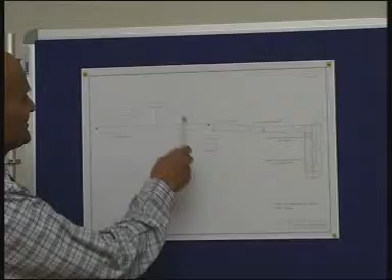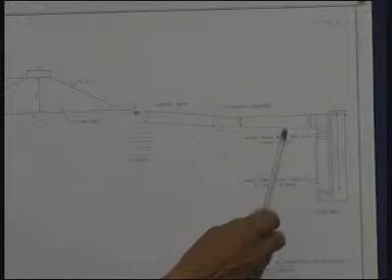Now we will go through one sketch to illustrate how this can be done. This is the minor irrigation tank in cross section, and this is the FTL, full tank level of water stored in the tank. Supposing this is the ground level, and in the ayacut, that is the command area of the tank, we have a dug well. These are all figuratively represented.

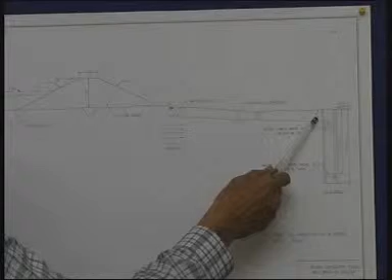When there is no water in the tank, the groundwater in the well would be at a lower level. When the tank gets water, even 1/4 full or half full, there would be recharge to the water table due to percolation and seepage, and the water table level will increase from low to a very high level, at a shallow depth of 2 meters below ground level. In some wells we see the water table coming right up to ground level, and in some cases water overflowing the wells in the command area.

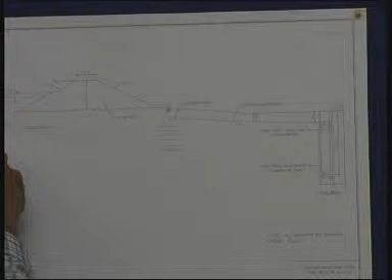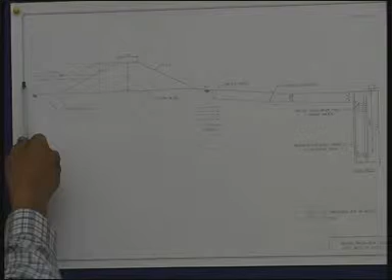This is possible because there is storage here, there is deep percolation and seepage water recharging the water table, causing it to come up. Therefore, the whole phenomenon occurs on account of impounding the storage and spreading the stored water in the submersion area, and that results in recharging the water table.

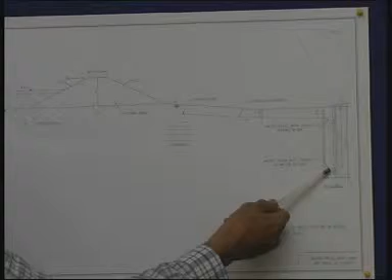If supposing a similar condition can be brought in the catchment area in the upland areas, we will be able to achieve the same result of increasing the water table level from a lower level to a higher level. This is what has already happened wherever such mini percolation tanks were constructed.

We will now go through the aspect of desilting the tank bed of minor irrigation tanks. There is a common feeling that when watershed development works are executed in the catchment area of the tank, there would be reduction in inflow into the tank, and to that extent the tank command suffers for want of water. Now let us see how far this would be valid, and if it is valid, to what extent.

For the purpose of understanding the whole problem, we can divide the various tanks into broadly three categories. The first category is where there is adequate yield in the catchment, yield more than what the tank needs.

That means there is surplus yield in the catchment area of the tank. In such a case, even if watershed development works such as mini percolation tanks and various other structures are constructed, there won't be any adverse impact on the flows into the tank, because there is surplus yield. So with regard to such tanks, there is no problem with the yield getting reduced.

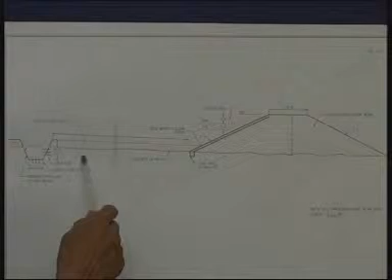So in such cases, the manner in which deep percolation has got to be increased, let us study how economically it can be done. This is the ground level and original ground level, and this is the full tank level, and the revetment is like this, and this is the downstream side of the tank. The water storage is on this side.

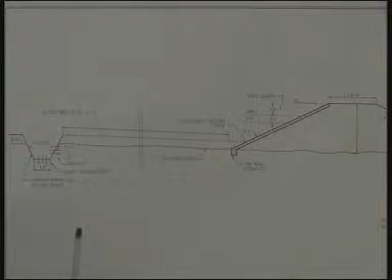And it got silted up to this level, let us say. One way of increasing the recharge in this percolation tank is to remove the silt which is close to the tank bund section, because this silt will be mostly clay. That could be removed, but that's an expensive item of work to remove the entire silt content.

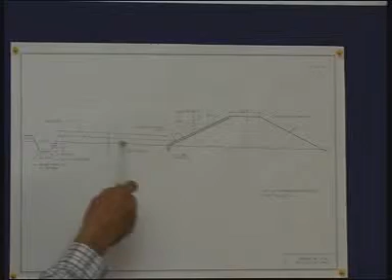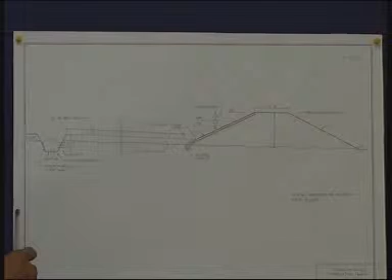Instead of that, we can achieve the same deep percolation and seepage by means of a trench excavated like this. The details of this trench are given in the guidelines approved and given by the Chief Engineer Minor Irrigation of Andhra Pradesh in 1986, and the diagram and details are there in that.

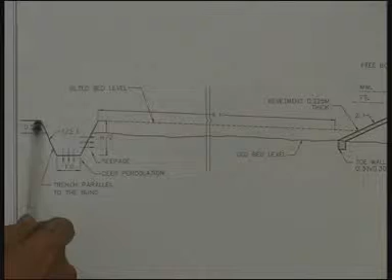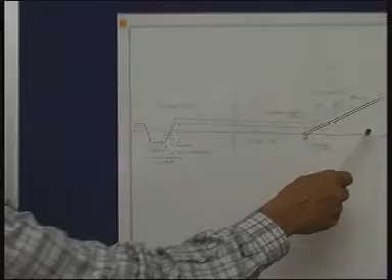To explain it briefly, this is just a trench with a stable slope, could be half to 1 or 1 to 1 depending upon the type of soil, and it can be excavated up to h by 2. Supposing h is the height of the bund, and supposing this is about 6 meters, height of the bund is 6 meters, then we can excavate up to 3 meters depth, not more than that.

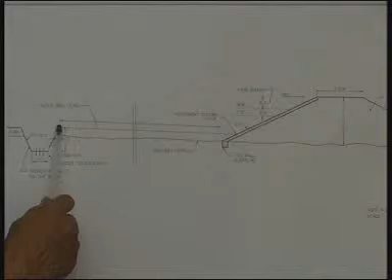If the height of the bund is 10 meters, we can excavate up to 5 meter depth, h by 2. And when we excavate this trench like this, the bottom portion as well as the sides are available for percolation down here and seepage here. So the stored water here, when the water is stored in the tank, the seepage is predominant through such a trench.

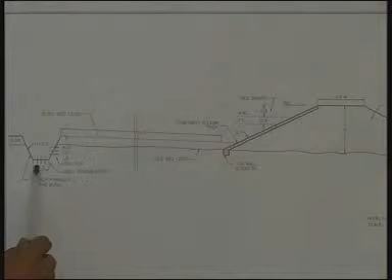This trench is excavated parallel to the bund at a particular distance, and that distance is usually 5 times h, which means suppose the height is 6 meters, this trench will be at a distance of 30 meters, 5 into 6, and not closer than that.

And this will be parallel to the bund, all along the bund. A small trench like this would be having a greater percolation rate, because harder soils will be there and coarser soils will be there at the bottom and the sides.

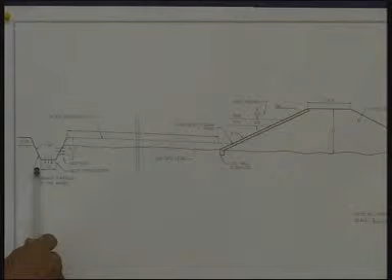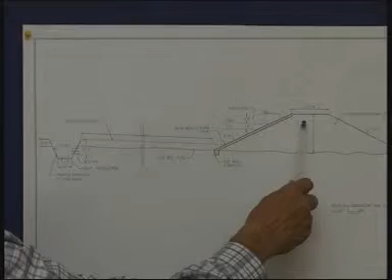The excavated earth from such a trench can be dumped onto the tank bund to restore the tank bund level or to have a flatter slope on the downstream side, not on the upstream side but on the downstream side. Many of the tanks may need also some improvement in the bund section by way of raising the top level or having a flatter slope on the downstream side.

So this earth will be useful for the purpose of strengthening the bund, and it should be used only for that purpose. It should not be deposited here.

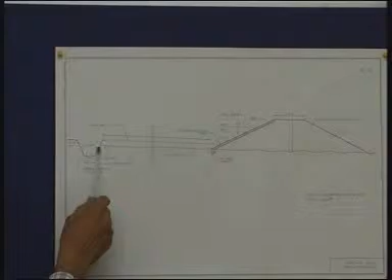There is no need to fill this with any rubble or metal or any such thing, because in some cases I have seen people doing the filling of the trench with rubble. There is no need at all. It doesn't increase the deep percolation. On the other hand, it is costly to get rubble and then dump it here.

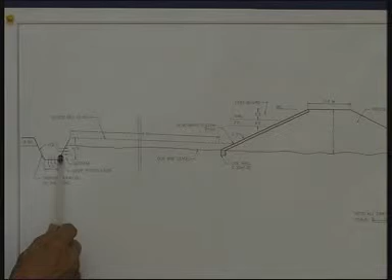Supposing it gets silted up, this also would get silted up over a period of another 10 to 20 years. It may get silted up. Even in spite of siltation occurring at the bed at the bottom, still the seepage occurs on the sides. So this seepage water would ultimately recharge the water table.

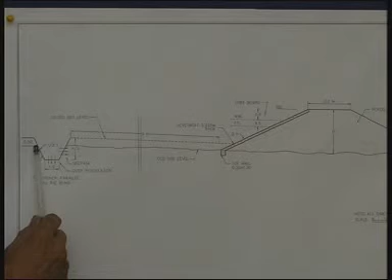If the siltation here is more than 50% of the depth, then we have to remove such silt and deposit it again onto the bund and restore it to the old section. So this is a simple, low-cost device which increases the deep percolation in a silted up percolation tank.